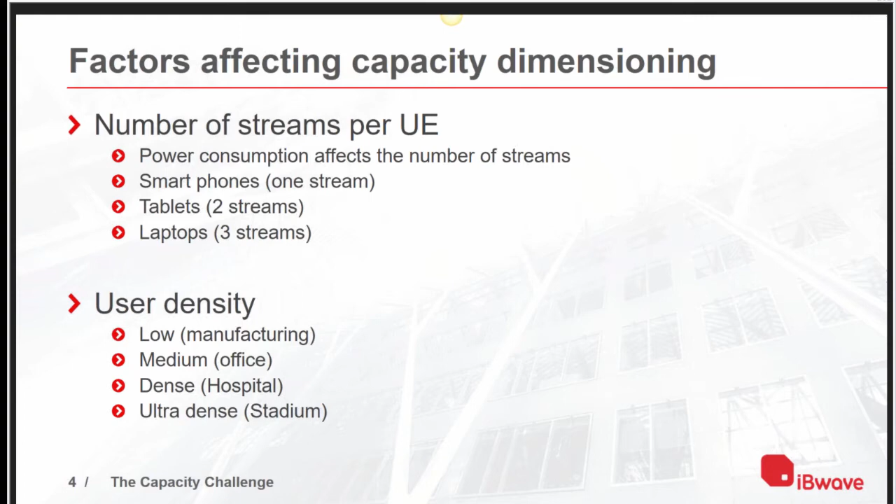And finally, the lowest user density would be in manufacturing. You really don't have that much traffic. It is a low traffic environment, and you occasionally have people scanning for items and so on and so forth. So those are four factors that we mentioned thus far affecting capacity dimensioning. Moving on, we go into three more.

802.11 technology obviously has the CSMA/CA algorithm, which is a collision avoidance algorithm, and it comes with a price. It comes with a complex negotiations protocol, which ensures to minimize packet collision at the AP receiver. And that overhead is different for different technologies. For older technologies, 802.11a, b, and g, that overhead is about 50% of the available airtime.

So let's take 802.11a technology, for example. We know that the maximum achievable data rate is 54 megabits per second. Because 50% of the time is reserved for contention, only about 50% of the time you can actually transfer data. So instead of 54 megabits per second, your throughput is really 27 megabits per second.

Things are better for 802.11n and ac. Their throughput can get up to 80% of the listed maximum data rate. The other 20% is overhead that results from the contention algorithm. So why is this important? It's important because the throughput you have available is basically the rate at which you can transfer your files. And the higher the throughput, the less time is needed to transfer the data.

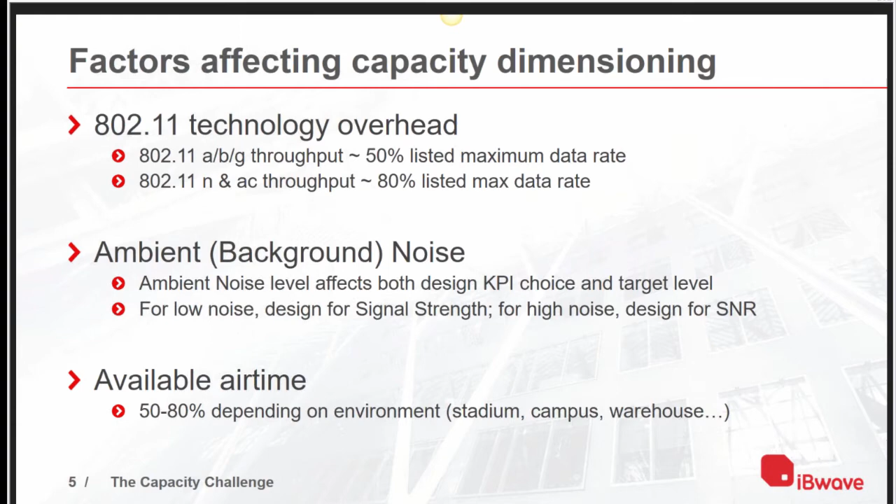And then granularity. That's another topic. Why is it important to have granularity in your capacity analysis? First of all, behind every capacity analysis there is an RF coverage analysis. We have to do RF coverage analysis before we do capacity. Why? Because we want to know if we have hit our design targets. That's number one. Number two, we have to do analysis of CCI. If CCI is bad, then it doesn't matter if we hit our KPI targets.

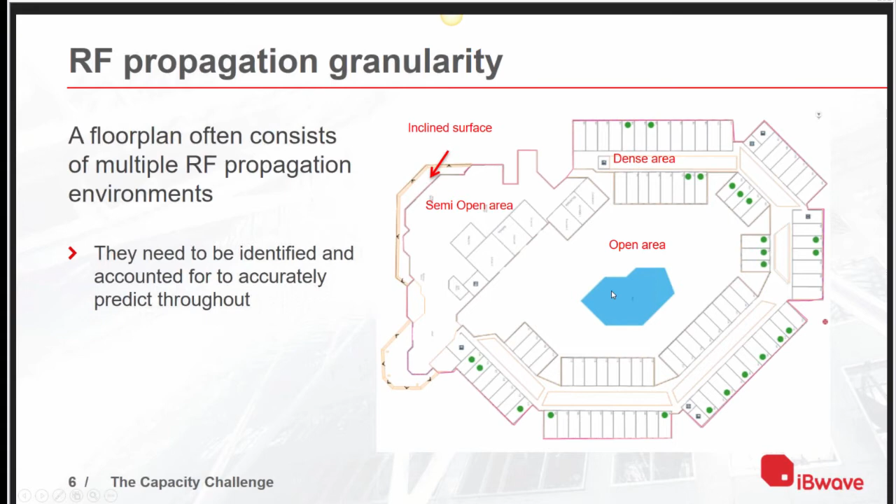So you have a very different RF environment. You need to be aware that these areas are there and that propagation is going to be different in them. In other words, you shouldn't be using spreadsheets to calculate the radius of your AP for this floor. You need to use a tool that can account for it automatically.

The next one is the 3D view of the signal. It is necessary for a multi-level building. You see that the hotel not only has this first floor, it has a second and third floor. So you need to be able to account for different propagation on each level.

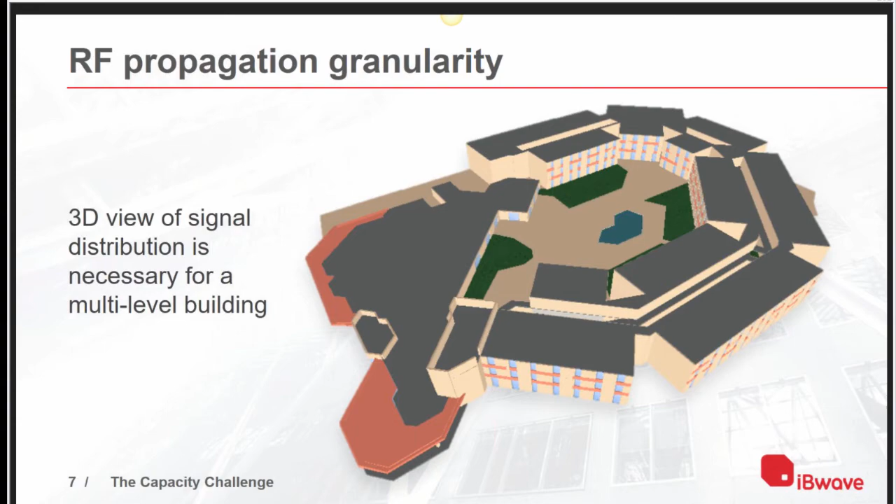I told you that CCI prediction is important, but look what's going to happen if you do it in 2D only. Well, this design obviously is not very good. At 2.4 on the left-hand side, you see a lot of CCI equal to 3 over the area smack dab in the middle. But it gets much worse if you look at what's going on when you take into account the CCI contribution from higher levels.

You see that CCI goes up to 10. And in this area, big area, it is 7. It is not 3. Then there are areas with 8 and 9, obviously, but this is really a big mess. But you don't get to appreciate how messy it is unless you do a full 3D CCI prediction. 2D basically tells you this is not good, but we can probably fix this. But 3D is saying you really need to rethink what you're doing.

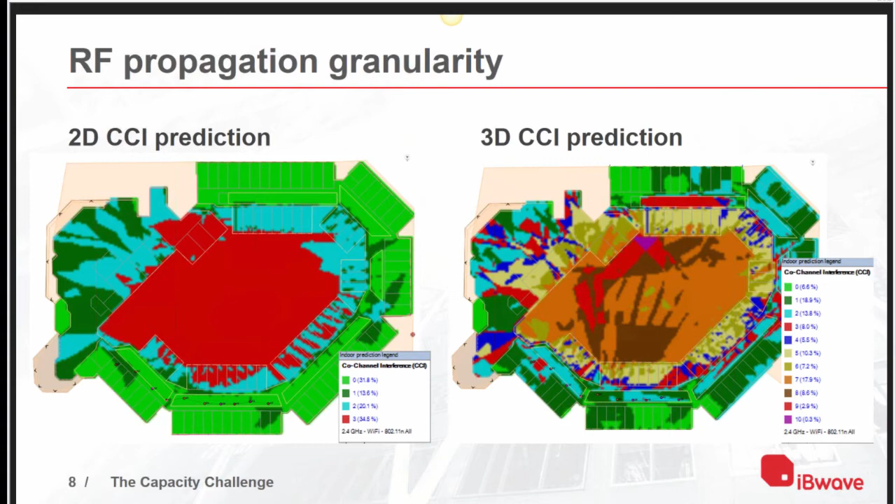User profile granularity. Well, most clients run a variety of applications over a period of time. So it is important to specify the period of activity in increments of hours for the peak usage. Applications that are likely to be used, email, browsing, file transfer, and the quantity, number of emails that you get, number of web page visits, number of files, etc., and file size in megabytes per unit. Well, it gets really complicated, but what it really boils down to, you need to specify how many megabytes each user is going to transfer during peak hour.

Now, when I said that, that is much more palpable. You basically have to say, okay, 100 megabytes per user during peak usage. Okay, good. So we can work with this. But point being is that we have not just one application, we can have lots of applications going on there. And those we store in what we call user profiles. So you can go and store a different user profile for a different environment. If you are a system integrator, you really do appreciate this because obviously a user profile for a hospital is not the same as a user profile for a stadium or office environment.

Now, the next topic to cover briefly is cellular and Wi-Fi. A lot of venues have a mix of small cells and DAS and AP, and we really have seen a lot of cellular carriers offload their traffic to partner Wi-Fi providers. The offloading mechanisms may vary. It may be offloading by application type, voice versus video versus data, offload by signal KPI threshold, or offload by cell load threshold, cell load at the carrier base station or eNodeB.

So bottom line, some customers are on cellular networks, some on Wi-Fi, and the percentage breakdown of cellular and Wi-Fi customers needs to be specified. This is done in each capacity zone. So if you happen to design for both cellular and Wi-Fi, you should specify the percentage of one versus another.

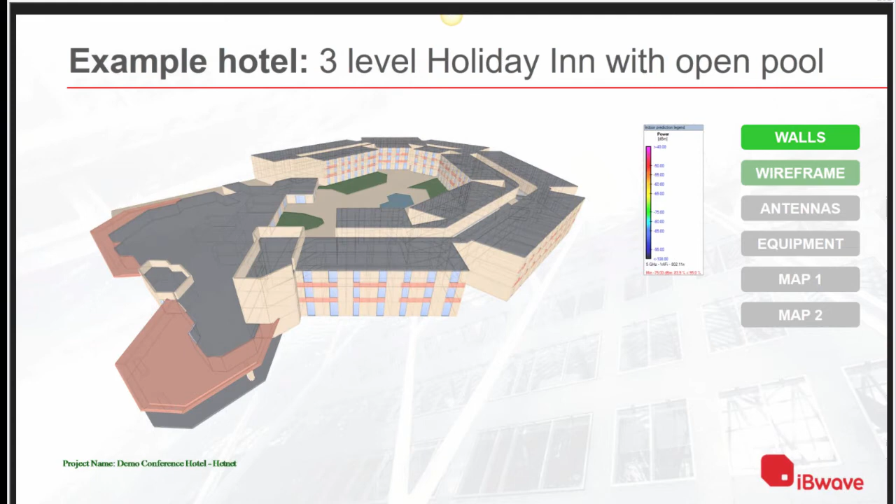So that's what our Wi-Fi suite can do for our customers. I'm going to give you an example. First, it's going to be just on a few slides, and then I'm going to go straight into a demo. I'm just showing you what our capabilities in 3D modeling are. This is a Holiday Inn hotel with a pool in the middle. And this is how it looks in full view with the walls and the roof and the details of each level. This is actually what we have, like a wire mesh presentation.

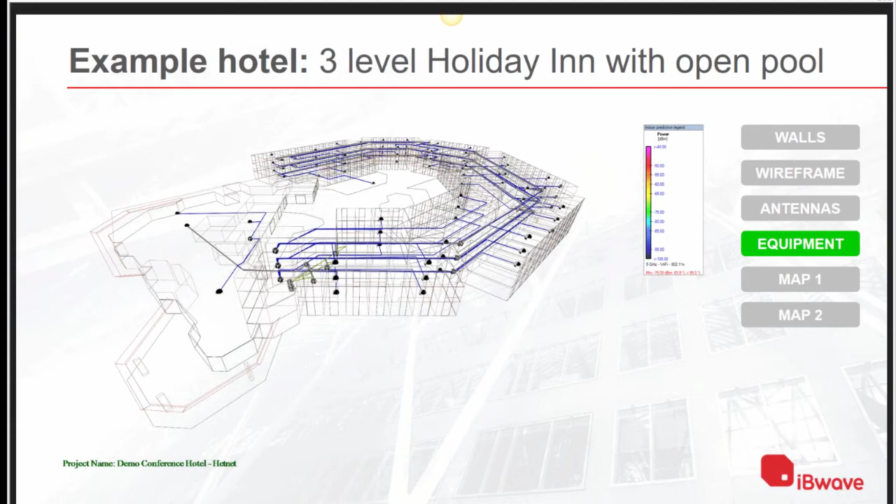And why is wireframe important? Because when you have wireframe view, then you can actually see where your APs are. Those black dots, those are APs throughout the venue. This is shown as antennas here, but they really are APs. This is a holdover from our DAS days. Occasionally we have that in our tool. And then equipment is there. See the cables, the cabling. And then finally, what you see is a 3D view of the signal level.

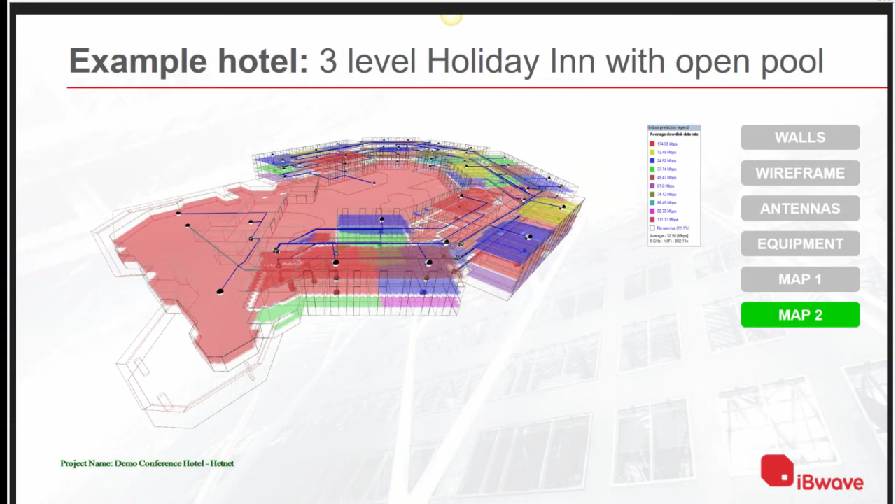So it basically gives you on each level the heat map for a signal level. And then the next one would be your average downlink data rate per client. This is not maximum achievable data rate. This is data rate per client. So this is at 5 gig, right? So having said that, let's move on to what we are going to show you as an example, as a demo. So this is that hotel.

This is a 2D presentation. I have chosen to give you a 2D presentation because it is easier to make a point. But what I want to tell you first is about this design. The target was to have -70 dBm as a KPI, to have it between 85 to 90% of this floor plan. And you see right now, -70 dBm, I'm at 87.8. So it looks like I'm doing well there.

This is 2.4, but you would notice in this design that obviously not all of them are active, because I have a design at 5 gig as well, which is the one here, which I did not give you the coverage for. I actually should do analysis. I will do it once I do optimization. Well, anyway, this is what I have.

I have placed initially this AP in the middle, right next to the pool area, thinking, well, I need to cover the guys that are by the pool. I have put one in the area in front of the ballrooms, because I'm thinking this is where the people are going to mingle before they move in. And I have also put one inside to provide for capacity. There is one to the side to cover these guys capacity-wise. And then I basically put them throughout this area where the rooms are.

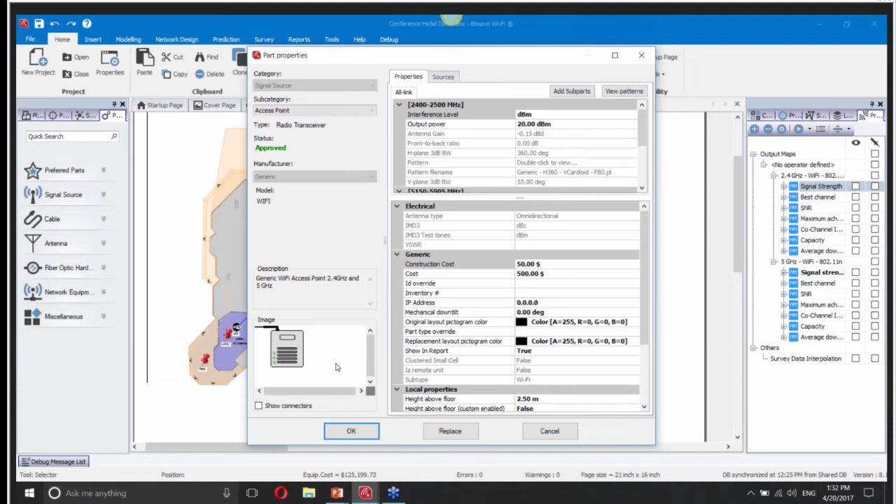But what I did there, take a look at this, is I let the power be at 20 dBm, full-on power. Don't be confused. I have put generic APs. I did not want to put anybody on the spot as far as OEMs. So this is generic, 20 dBm power, full-on power at 2.4 gigahertz. So now, most of you are laughing already.

Well, this is not a good idea, because even though I have gotten nice coverage there, when I go into co-channel interference, look at that. What I have is CCI equal to 3 throughout this area, right? So the first thing that I need to do is get rid of this nasty looking red area and try to maybe have CCI equal to 2. If I cannot completely get rid of CCI equal to 2, I'm going to try to get rid at least of CCI equal to 3.

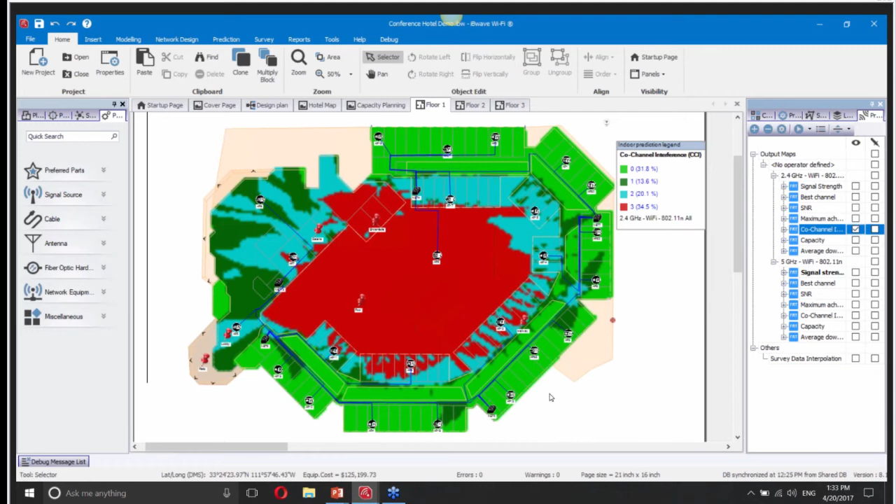Okay. Why do I want to do that? Because the higher the CCI, the lower the data throughput per AP is going to be. So I can't go and do my capacity thing if I have this mess of a CCI coverage. So what I did, and now I'm going to open another window that's going to show you what I did here. So I moved that one that was in the middle of the open area here. I also reduced the transmit power. That transmit power is -5 dBm.

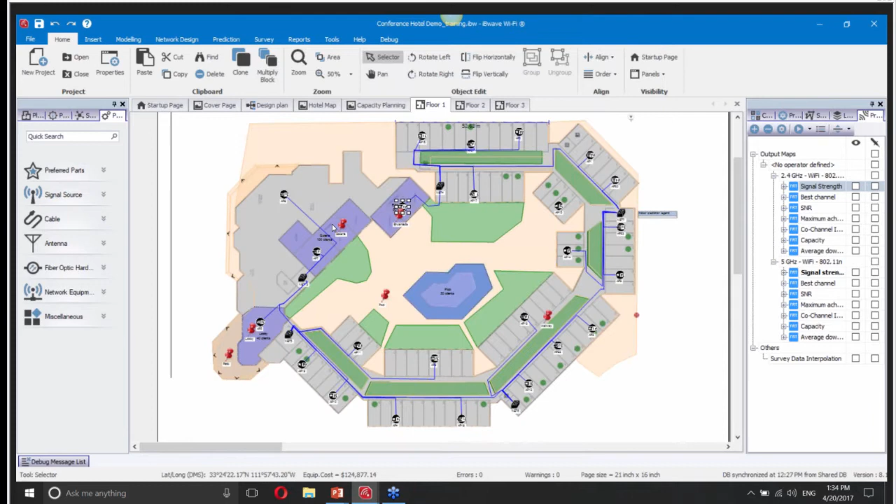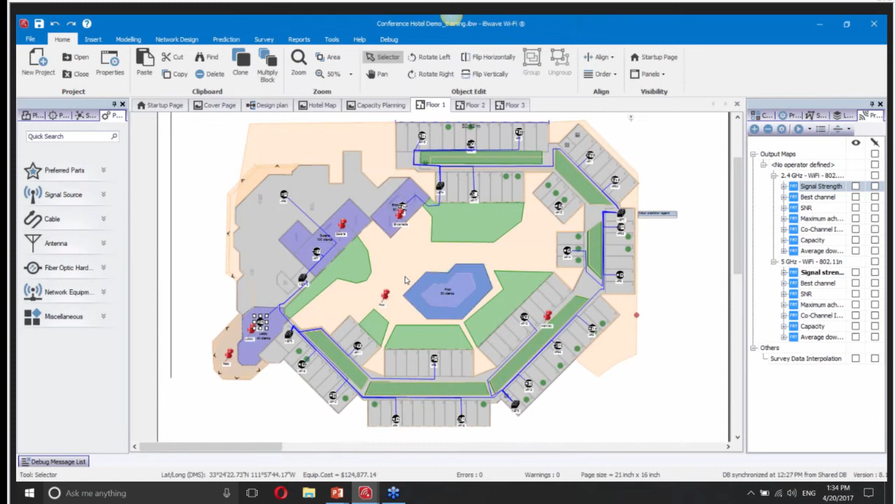Okay. I've also reduced the transmit power of those APs that are in semi-open areas, such as this one, which was near the ballrooms, as you see. This guy is now at 0 dBm. I also reduced the power of that guy to 10 dBm. And I think this guy as well is at 0 dBm. So basically, I'm trying to do the coverage control by reducing the power. The price I pay, I'm at 80%.

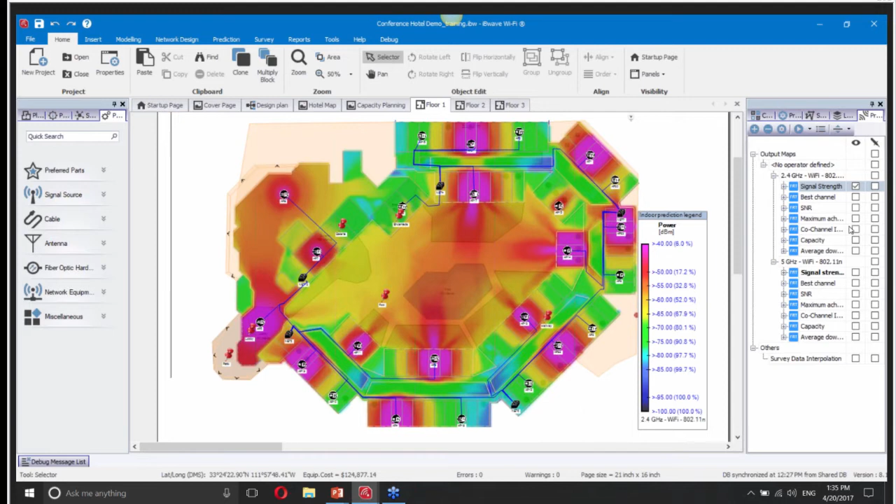I'm at 80% now. What I can do is I can probably go in and turn this one on, which is going to improve the coverage in this area right here. And tinker a little bit with the APs, maybe increase the power, maybe move this one closer to here, etc. But you get the idea of what I was doing. And then the co-channel interference, we look at that. CCI equal to 3 has disappeared. It is not there anymore.

So I have at least got rid of CCI equal to 3 and increased the area with CCI equal to 1 and CCI equal to 2, but I think I increased the CCI equal to 0 as well a little bit. We can go and we can check this out. Yeah, CCI equal to 0 was about 32%, and here is 36, and I increased the other two.

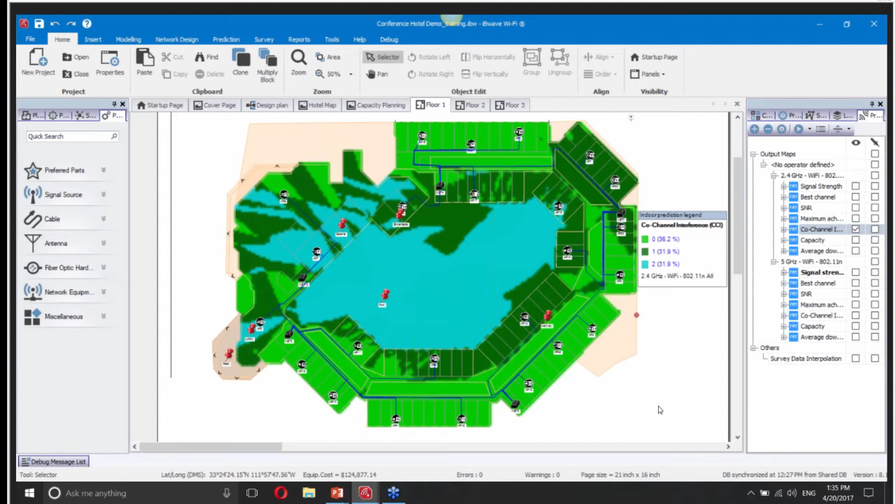So what I did on that level should be done on the next level and the level above. Okay, you optimize for each level, and then you do the 3D analysis of CCI and see how much better you have become. And now we move on into capacity. So here is where we define our capacity.

As I told you, for each floor you can define the number of clients, and then in a usage profile you can say what it is that you have. Right now, I have defined this as a hotel, but I have others as options that I loaded up in my database that I can use if I want to.

I specify the breakdown between cellular and Wi-Fi because somebody will not be able to use Wi-Fi for whatever reason. Usually when they are registering at the hotel, they still did not get credentials, so they use cellular. You can define per zone, as you see here.

And I have on floor 1 different areas. I have a lobby, I have pool, I have a cantonada, which is those conference rooms, and gallery, I think, is a conference room as well. So usage profile is for a conference room, and so you can define that, and that is the granularity that we talked about. You basically draw the areas around the hotspot, and then name it, and then you say how many clients, and you assign usage profile, and so on and so forth.

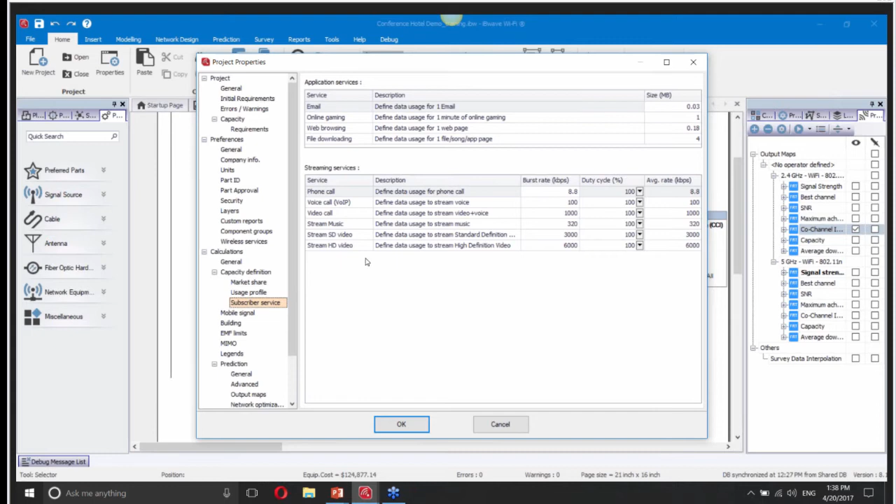Now, usage profile. This is where you actually can store different usage profiles. You can define a different one for airport, a different one for cafeteria, conference room, etc. And finally, this is the one where you define a subscriber service. This basically has to do with the file size and the duration of a typical file transfer for streaming devices. In other words, you define a typical use here,

and then here you refine that by saying, for example, in cafeteria, I'm going to use 3 emails, 6 minutes on online gaming, 10 pages of web browsing, and all that transfers to the size in megabytes, and then you get a total size. So in cafeteria, it's going to be almost 200 megabytes during peak usage. Now, you have peak usage, let's say 1 hour, you have a file size, 200 megabytes.

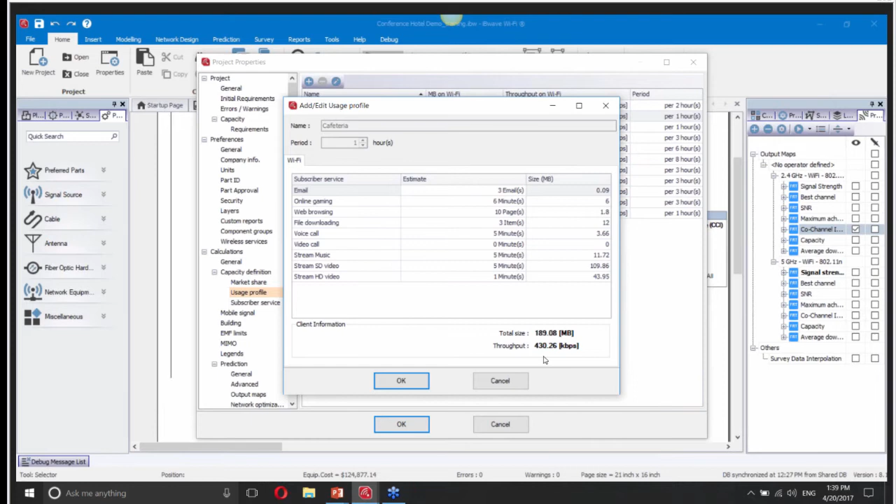What you do see here is average throughput. Doesn't mean that I was transferring that much during that peak usage. I will transfer a bit, and then I'm going to be silent, transfer a bit, then be silent for a minute or 2 or 5. This is average over peak usage time, which is in increments of hours.

Okay, having said that, I'm going to complete this presentation by telling you that I'm going to run capacity now. After I defined all this, I'm running capacity at 2.4. And what is going on? I'm failing. Okay, so what did I do? Well, here I said that I want to have up to 80% of airtime usage. I ended up at 140%.

So why is that? It could be that I have a lot of clients there, and they're transferring big files. So these two APs are suffering. They are really not doing as well as I would want them to do, right? So they're failing, and I'm not going to have a very good performance there. So what can I do?

I can put another AP there, which is going to mess up my CCI at 2.4. I can say, well, maybe I don't have that many clients. Maybe I have fewer clients there and reduce the number of clients, but hopefully, we put the number of clients that we did originally for a good reason. So that is out as well.

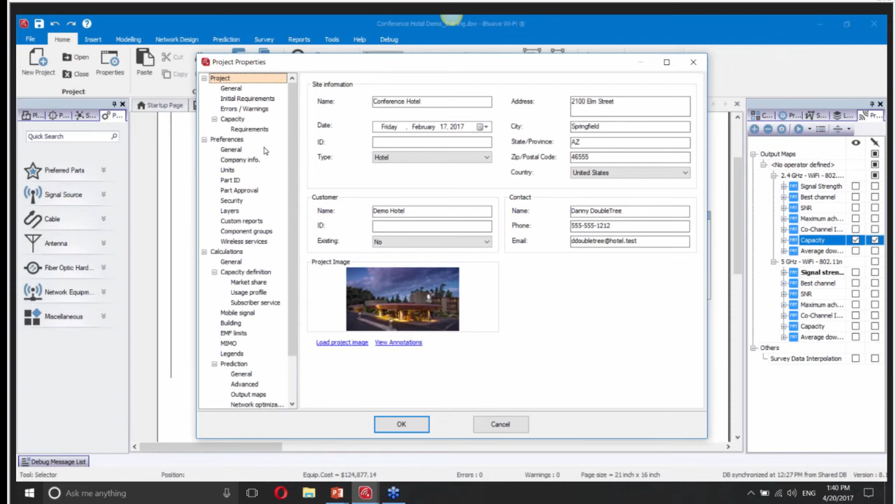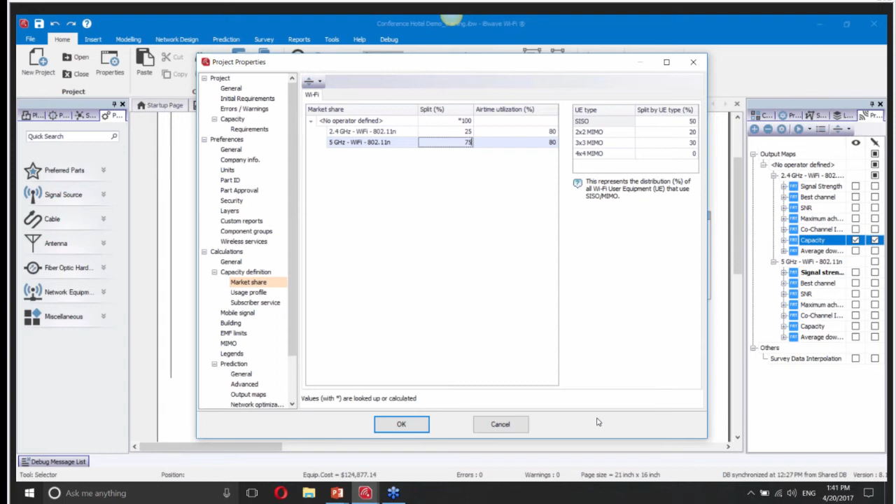What I can do is I can go in here to market share, and I can say, all right, let's say that I force clients to be mostly on 5 gig. It was a 50-50 split, but then I'm basically saying I'm going to do that. And you can do that within an AP. You can log in and you can say, this is the percentage of clients I want at 5 gig. So once you do that, you then rerun the capacity analysis and see what happens there.

And this should be done within less than a minute, I think. All right, so that was at 2.4, and you see it passed now. So everybody's happy, in this area where I had 140% airtime usage, now I have 70% airtime utilization, and my limit was 80%, so I'm good.

So the next question is, well, what happened at capacity at 2.4? I'm sorry, at 5. Well, first of all, co-channel interference is fine here because we were able to properly allocate channels. Now we need to run capacity analysis here. And why? Because we just moved quite a bit of clients to 5 gig.

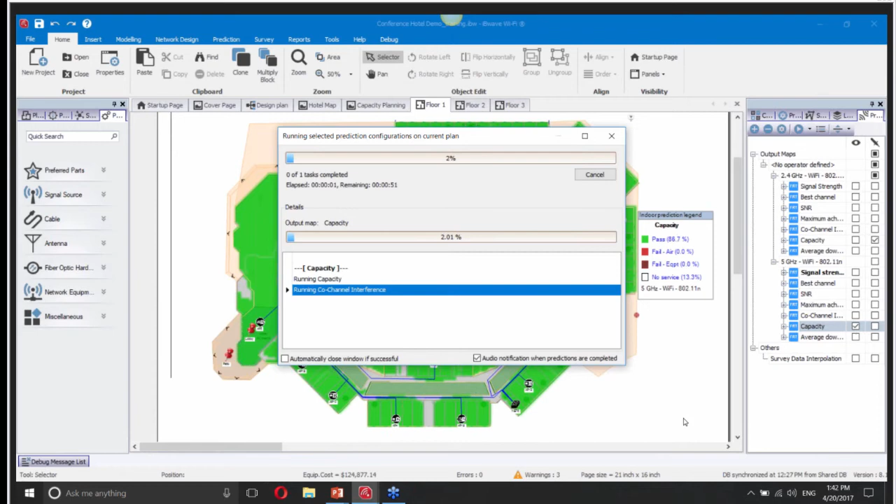So I'm going to run on this plan, and this actually is going to run for about 2 minutes or so because I have a bit more clients at 5 gig than I have at 2.4, which is not surprising because propagation is not all that good at 5 compared to 2.4.

So you're going to wait a couple of minutes for this to be completed, and if it is green after I moved more clients to 5, then it means that I did a good job allocating clients to different frequency bands, and this number of APs at 5 and number of APs at 2.4 is okay.

So anyway, we're still waiting for this to complete, and it should be shortly. This actually is the last example that I wanted to show you, and this will conclude my presentation. So we just need to wait for maybe a minute more.

Hey, Vladin. And then, yes. While this is running, could you talk a little bit about the different propagation models that are available in this tool and how it's actually making these decisions? Yeah, there are 3 propagation models. I cannot switch to them now while this is running, but we have the ray tracing, which is the most complex, and this one is used to do this analysis.

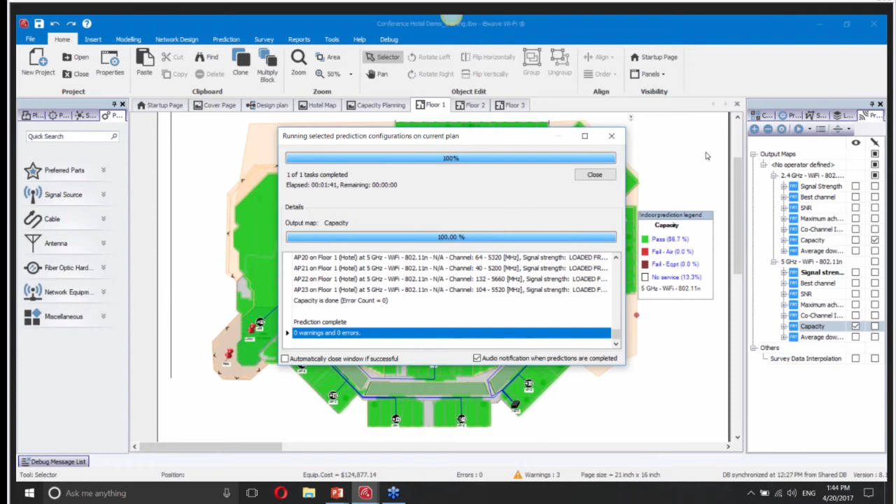By the way, this is done, so I have passed here, so we are good. Capacity passes on both frequency bands. So this is called ray tracing. This is the most complex, and it takes the most CPU time to complete, but is the most accurate.

Then there is another one called COST231, which only relies on a direct path between transmitter and receiver. The ray tracing takes into account direct path, reflected paths, and diffracted paths, which is really important for a 3D analysis. COST231 uses only direct paths, and it has decent accuracy if it is not a very complex venue.

I would not use COST231 for, let's say, a stadium, or maybe even this hotel may not be the best choice. But it depends on the size and the complexity. And then the least complex is another variant of a one slope model, which is called variable path loss exponent. It is very light on computation time, but its accuracy is limited. We have all three of those in our offering.

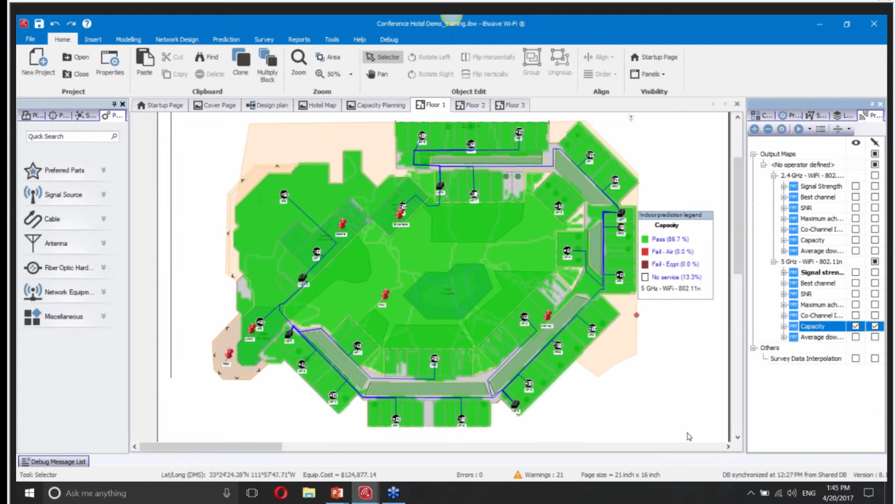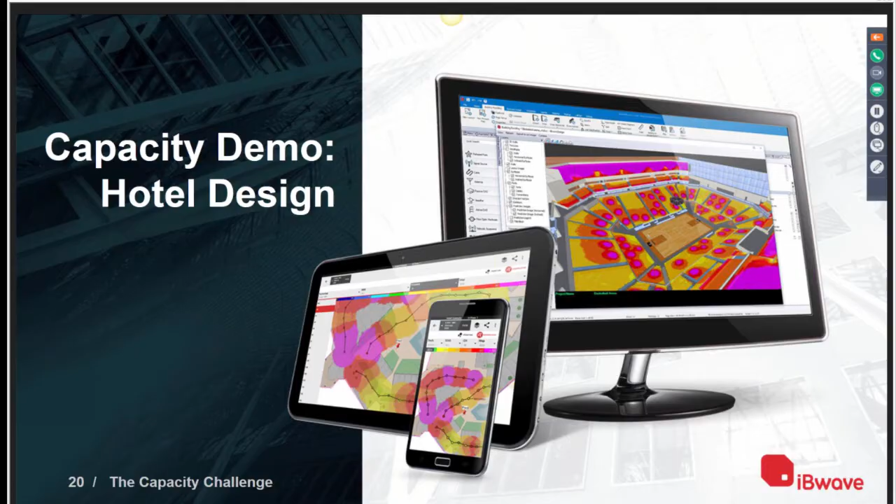So having said that, I'm going to now switch to my parting slide, and with the information, oops, I need to change display settings, swap, yes, and then I'm open to questions now.